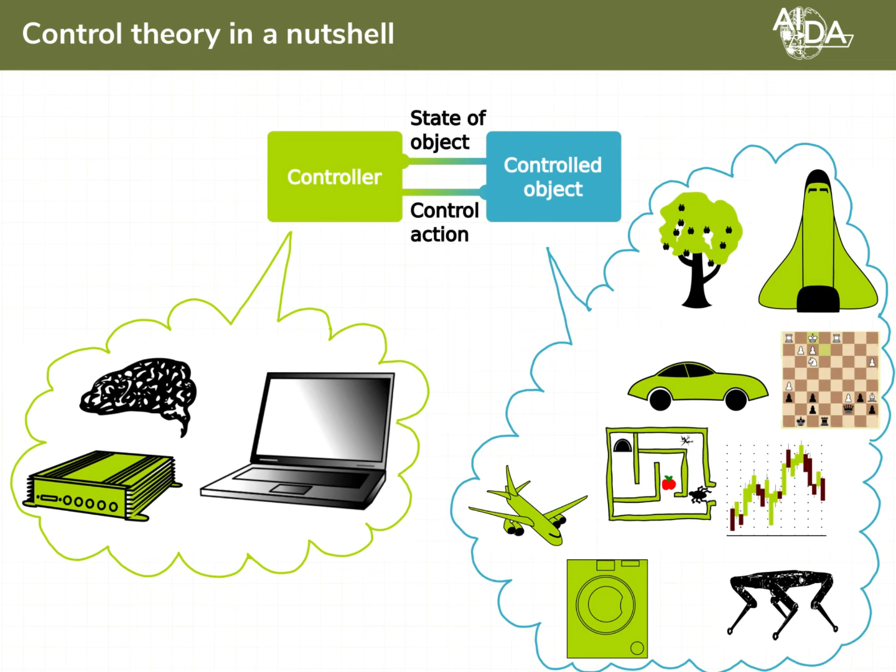Formally, systems can be described as follows. First of all, we need some notation. So let us denote the internal state by X, control input, control action, by U, and output by Y. A general form of a system goes as follows. Next state of the system is a function of the current state and control. Output of the system is some other function of the current state and possibly input, which is actually not so commonly the case.

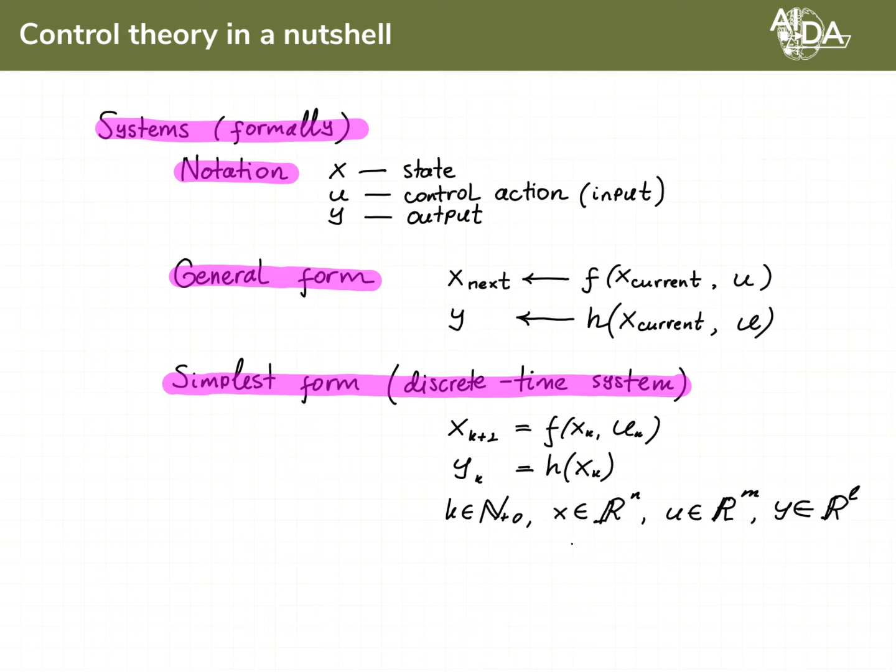Probably the simplest form of a system is the so-called discrete time system. This is a system in which time is treated as a sequence of discrete moments. In such a case, we simply put some index, let's call it k, which is an element of natural numbers with 0, for this notation next, quote-unquote, current over here, and we put the index for the state, for the input, and for the output, and here is the description that we get. And in general, the state, the input, the output are vectors of some dimensions.

Let's give some examples of discrete time systems. Speaking of video games, this could be something turn-based, for example, such as chess or Go. And in chess, you can consider the state, for example, to be essentially the state of these squares on the board arranged in a vector. So, for example, this could be something like the first position, which corresponds to a1, a rook, a pawn on a position that corresponds to a2, nothing on a3, and so on and so forth. But there are, of course, other ways to arrange this, and input could be, for example, a pair of squares, which corresponds to a move.

Another example could be a digital electronic device with a determinate clock rate, such as a microprocessor, in which case we can consider the state to be just the current state of all the registers, and input just a command. Finally, let's say a stock market where an investor makes just one transaction per trading session, which could be, for example, a day. And here we can include his or her total assets into the state vector as well as the stock price and so on and so forth. And the input could be buy or sell stocks.

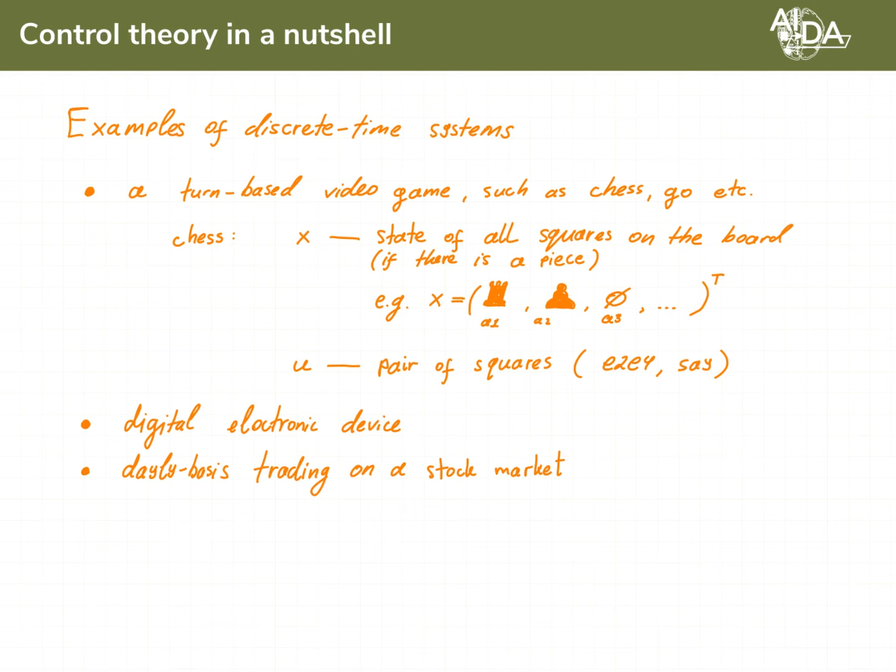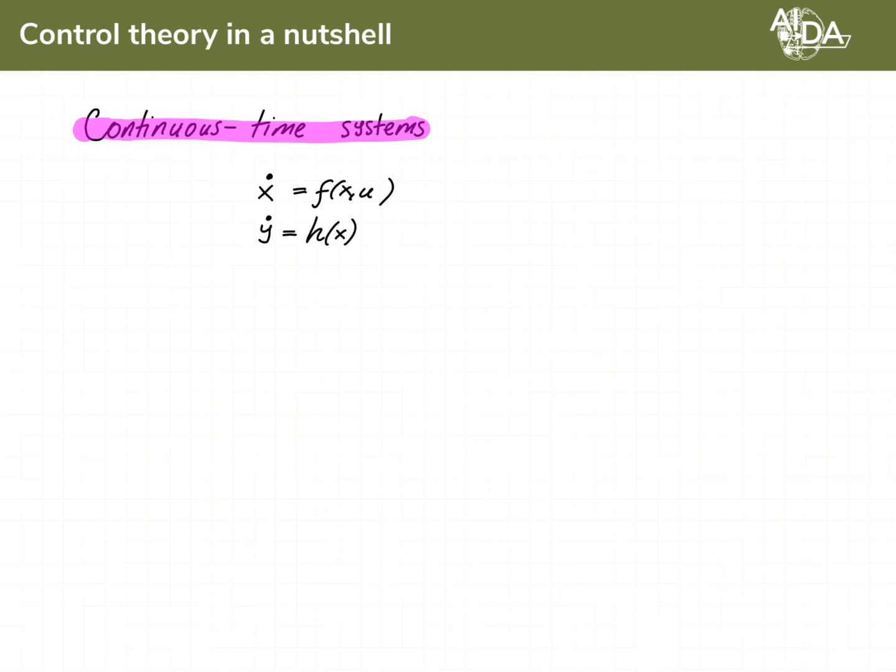But the most important category of systems is perhaps the time continuous ones. These are usually described by differential equations. And practically any physical object is a continuous time system. So let's consider, for example, a mobile wheeled robot. This is a system which is described by 5 differential equations depicted over here. We have our two coordinates on the plane. This is chi and this is eta, and I deliberately did not use x and y in order not to confuse with the state and output.

V is the speed, alpha is the angle in the global coordinate system, omega is the revolution speed around the vertical axis. So the first three equations are basically kinematic. We have our chi component of the speed, which is just the magnitude of the speed times the cosine of the turn angle, eta the same times the sine, and the derivative of alpha, the turn angle, is exactly the revolution speed. These two equations for v dot and omega dot are derived simply from Newton's second law. And for the input, we just take the force, the pulling force acting on the robot, and turning torque, M.

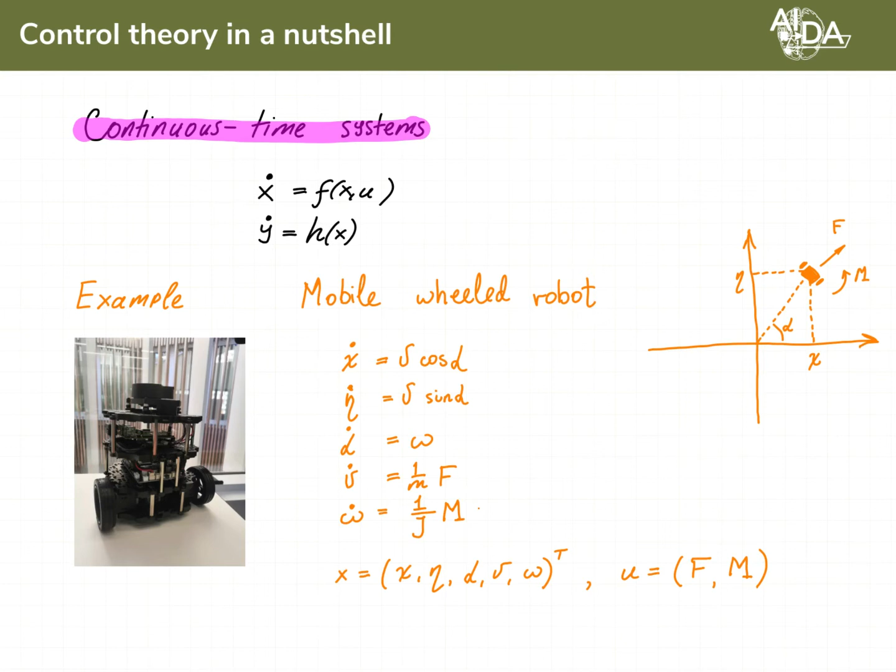Our picture of systems wouldn't be complete without mentioning what's called stochastic systems, systems with randomness.

So for example, in the discrete time case, instead of a determinate value for the next state, given the current one and the control input, we would only have probability of taking a certain value, and given not just the current state and the current action in general, but the whole history of preceding controls and states.

In the continuous time case, it gets to a rather complex object called stochastic differential equation, whose more or less generic form is depicted over here. And without going too much into detail, let's just compare the description over here in the deterministic case and stochastic case. What we see is that there is an additional term that has to do with the random walk. So precisely this diffusion term over here is responsible for randomness in the system.

Let's give some examples. So for instance, in the case of turn-based video games, if we add a random number generator, we would get a system that falls into this category nicely. Or a card game, such as poker, let's say. In the continuous time setting, an example could be an investment portfolio where we consider development of the prices, stock prices continuously, and we can trade throughout the trading session. Otherwise, virtually any physical object with random noise can be considered within this category over here.

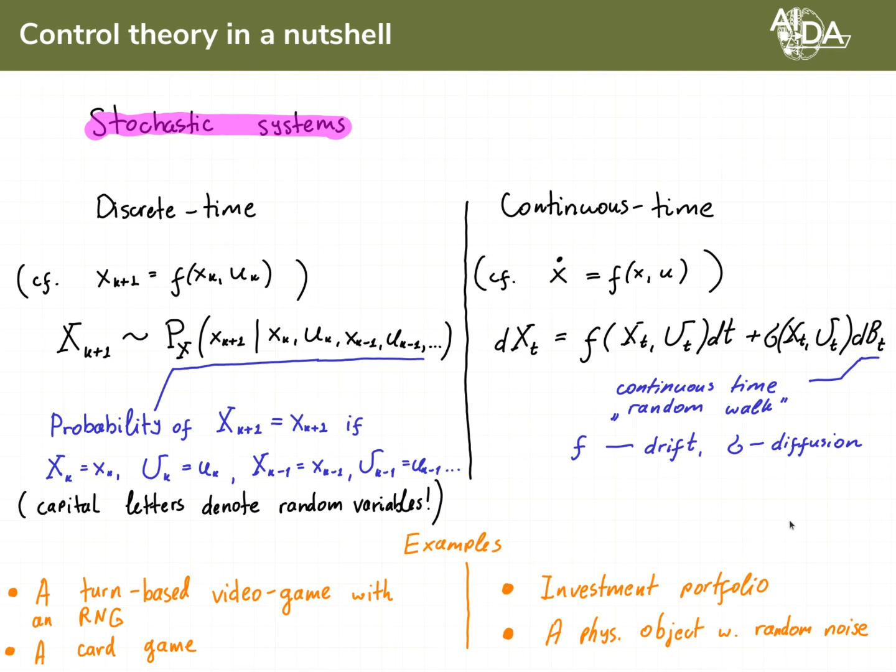Speaking of control goals, several options are possible. Just a few of them are listed here. This could be something as simple as reach a desired state, for example, park a mobile robot. Something more sophisticated as stabilization, which is like reaching a desired state but also keeping it. So you could think of an inverted pendulum that we need to upswing and hold in vertical position.

Something yet more sophisticated is so-called optimal control, where we are optimizing some performance mark. For example, in case of investment portfolio, we might be interested in maximization of total assets by wisely trading on the stock market. And then there is identification, which is actually an extremely important part of control theory.

Identification is about estimating the state of the object from the output. So the output can represent, for example, measurement data from sensors. And from this measurement data, we want to determine what is happening inside of the object.

Let's talk about control methods by which we can achieve the stated control goals. And first of them will be the so-called proportional integral derivative controller, or PID for short. This is probably the most popular control method out there. Its roots can be traced back to as early as the 19th century. For example, the so-called centrifugal governor, depicted over here for controlling engine speed, could be understood as a mechanical representation of a PID controller. Let's consider the following example.

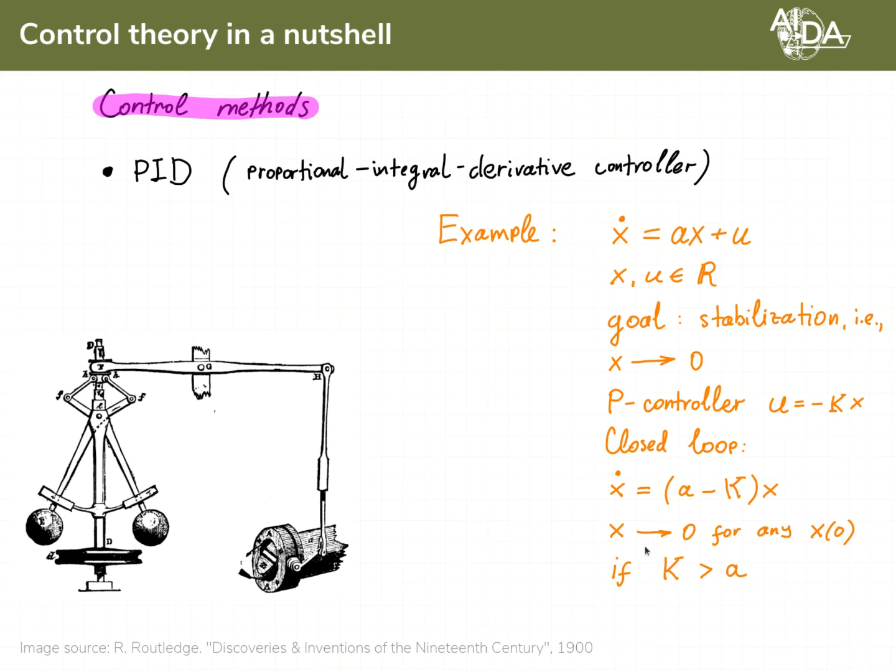Now the coefficient in front of X in the right hand side description of the closed loop is now A minus K, and if we set K to be greater than A, then for any initial condition X will tend to 0. A full description of PID for a system with an output and non-trivial set point y star reads as follows. We have proportional term, integral term, and derivative term. The intuition behind this is as follows.

If the error, which is y minus y star, is large, then the control action becomes larger. With these two, the effect is the same, except that over here we have a cumulative effect over the past error. And here we're sort of anticipating the development of the error while looking at the derivative.

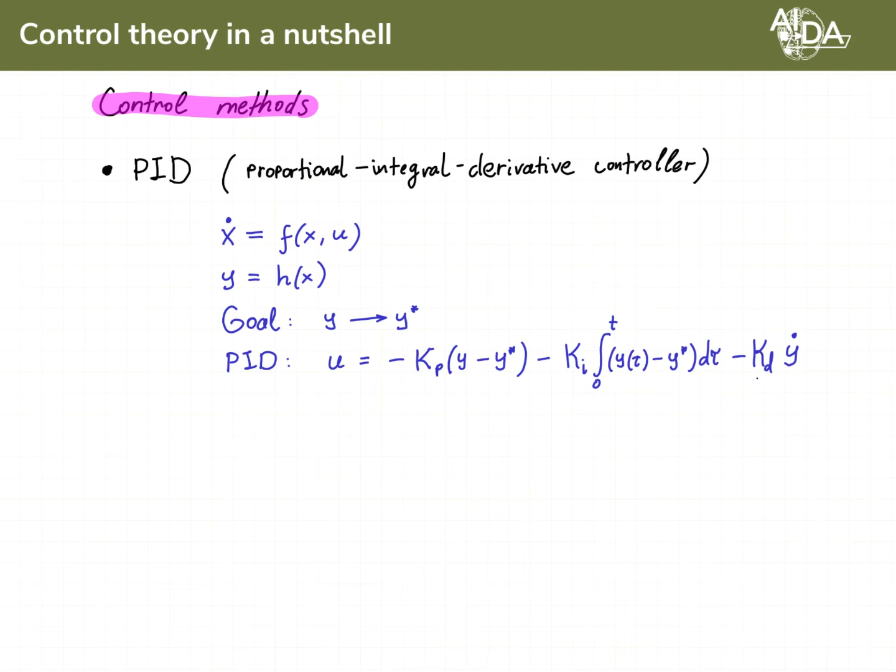Next control method is the standard one, quote unquote, for optimal control. This is called Model-predictive controller. Model-predictive controller, or MPC for short, is about predicting future sequences of states under sequences of control actions and finding the optimal one with respect to a metric called stage cost. Stage cost can be understood as a quality index of a state and control action.

We take those and sum them up to some step n, which is the horizon. So we look some n steps ahead and we minimize over the actions that generate the respective states and subsequently stage costs. And this is all done under state prediction. And state prediction is performed via the model. Now this is precisely the description of a discrete time system that we are MPC controlling. The algorithm goes as follows. We take the system specification, i.e.

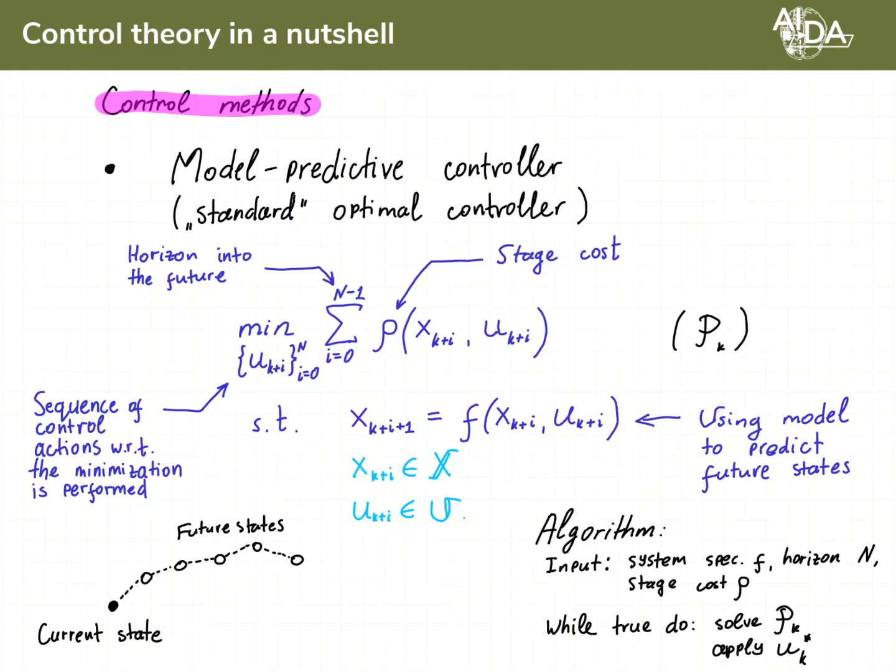Next popular control method is the so-called sliding mode controller, or SMC. This is a kind of a controller with switched structure. Switching happens on different sides of the so-called sliding surface. Under SMC, the system enters a special mode called sliding mode, which is exactly on the sliding surface, and then it slides along the surface straight to the origin, and so the stabilization is achieved.

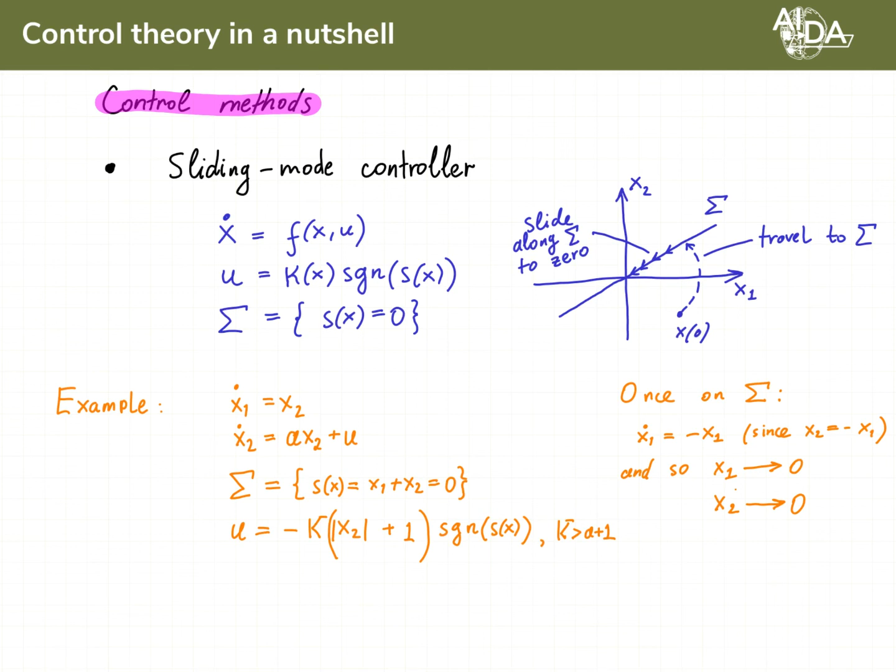Here is a little example of sliding mode control application. We have a two-dimensional system and a sliding surface which is described by x1 plus x2 equals 0. If we pick such a controller, we get finite time convergence to the sliding surface, and once we are on the sliding surface, the overall system amounts to this simple one-dimensional one because of the relation x2 equals minus x1, and we get the convergence of x1 to 0 and respectively x2 to 0, and so stabilization is secured.

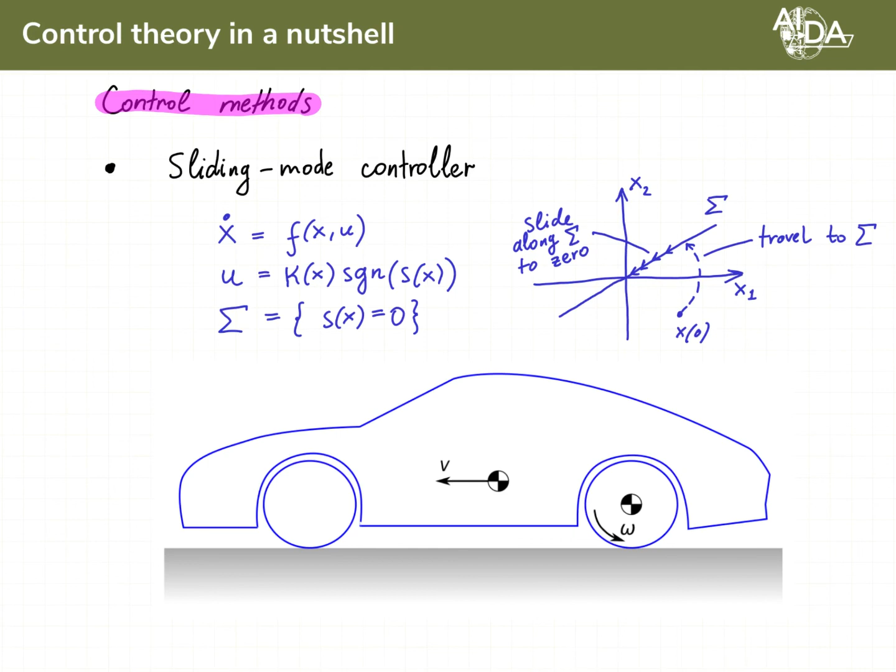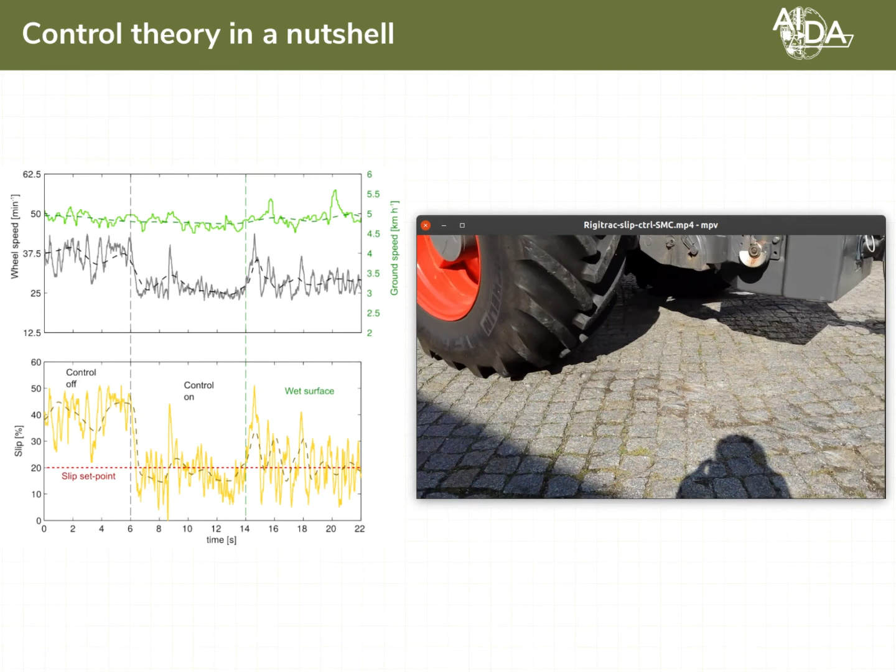Sliding mode controller is, for example, used in some traction control systems and anti-lock systems. Traction control is especially important in off-road vehicles, where too high slip can lead to excessive tire wear and fuel consumption.

There are actually a lot of types of control with different level of complexity and different features. For example, so-called robust control is the one that maintains functionality despite presence of uncertainty, such as, say, measurement noise, actuator noise. Adaptive control is the one that contains learning elements that adapt to the changing environment. Fault-tolerant control retains functionality in presence of faults. Certain types of systems, for example network, complex or hybrid, in turn require certain adaptation of the control algorithms applied.

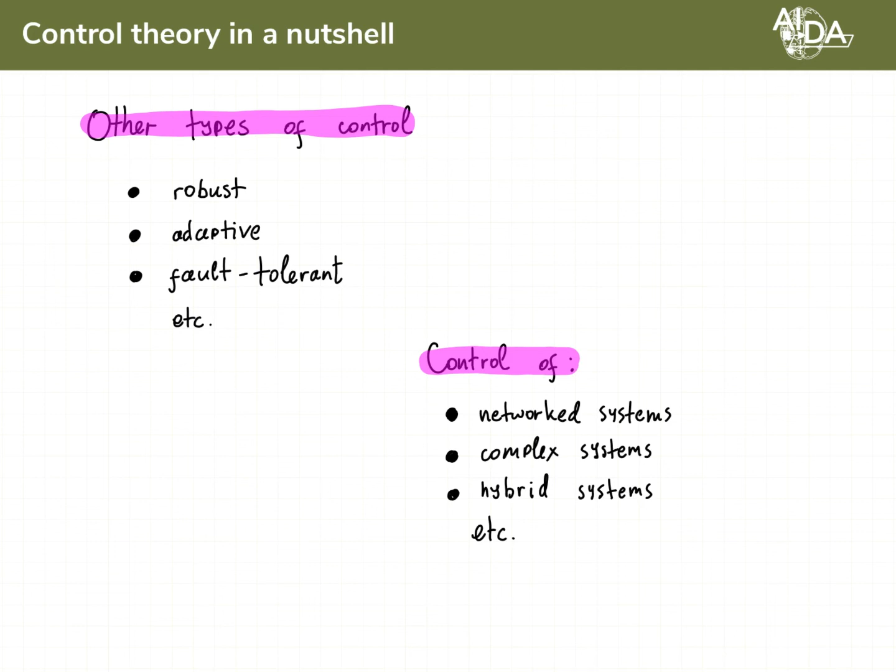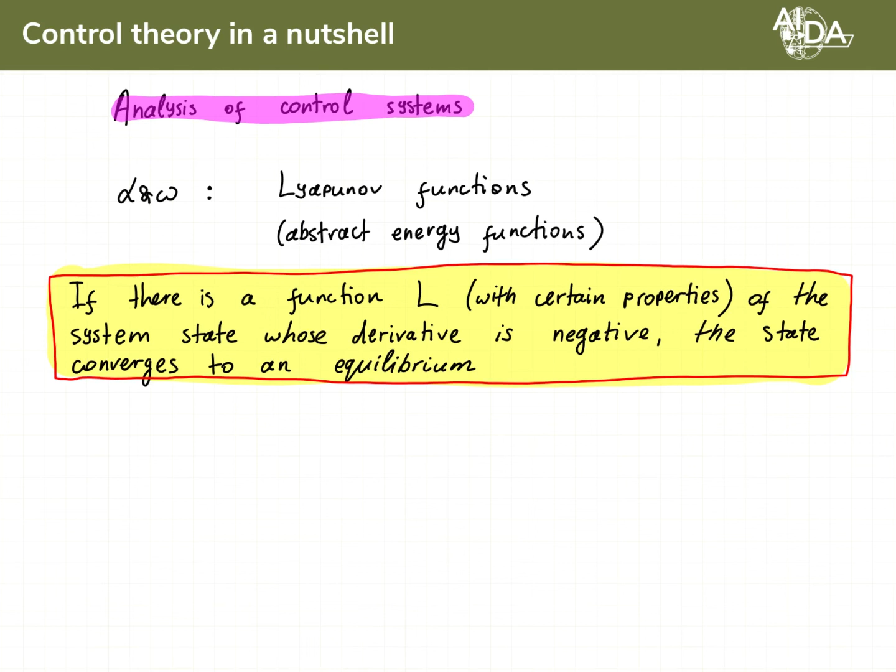This is where formal analysis of control systems is required. Control algorithms have to be formally certified for their functionality. There are various tools for that sake, but probably the alpha and omega of those is due to Lyapunov, via the so-called Lyapunov functions, which play the role of abstract energy functions analogous to mechanical or electric energy, let's say. In a nutshell, what Lyapunov theory says is that if there is such an abstract energy function that has certain properties, in particular it is positive definite, it depends on the system state, and if the derivative of this function is negative, then the state necessarily converges to an equilibrium.

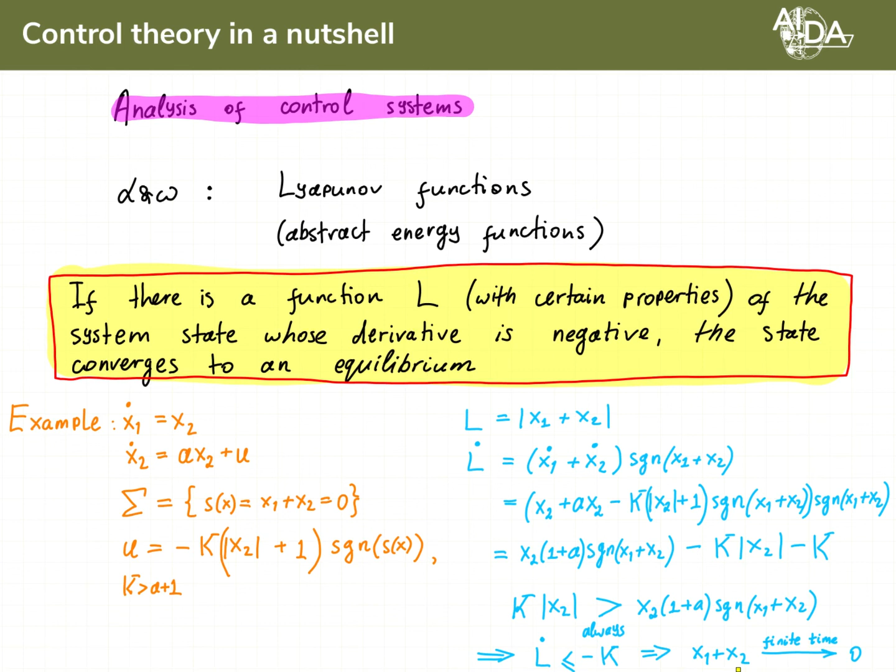Let's recall the example from the sliding mode section. So this is the system, this is the sliding surface, and this is the controller. Pick an energy function in this form, absolute value of x1 plus x2. Differentiate it, unwrap all the terms, and observe that the derivative is not greater than minus k, which is a constant, which means that x1 plus x2 necessarily converges to 0 and moreover in finite time.

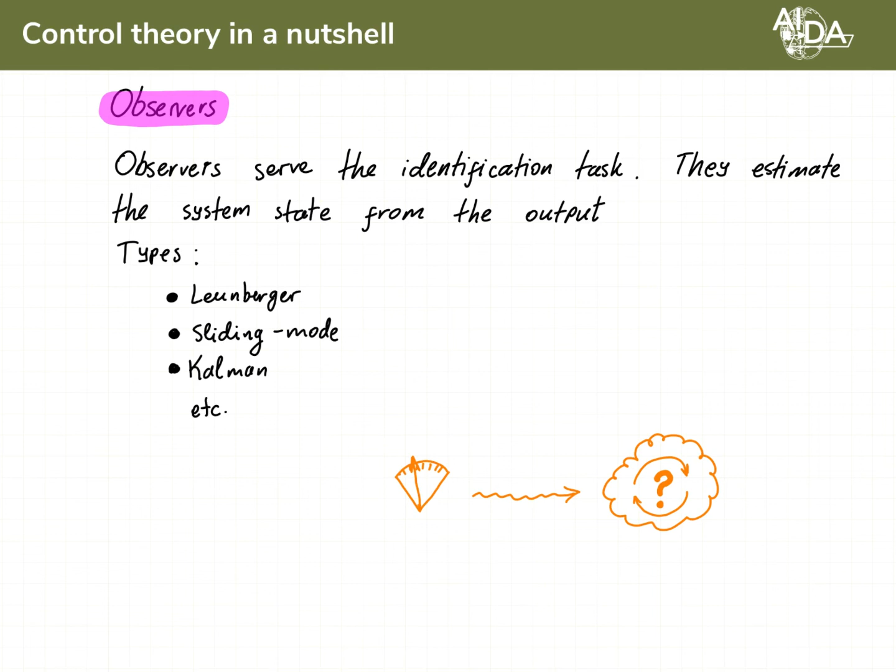As for the task of identification, i.e. determining the system state from the output, there are so-called observers. They could be roughly understood as virtual sensors, algorithms that are physically not there but are capable of measuring, quote-unquote, hidden states. There are different types. Some of them are listed here. Probably one of the most popular ones is the famous Kalman filter.

Let us conclude this video by saying that control engineering nowadays is as relevant as it could ever be, despite already being a classical discipline with almost 100-year history. The area where control engineering and machine learning, the backbone of artificial intelligence, meet is so-called reinforcement learning. This can be thought of as being a kind of an adaptive controller. It turns out that only synergy of the two disciplines can enable guarantees on reinforcement learning, which is extremely important in industrial applications such as self-driving cars, autopilots, complex robots, etc.